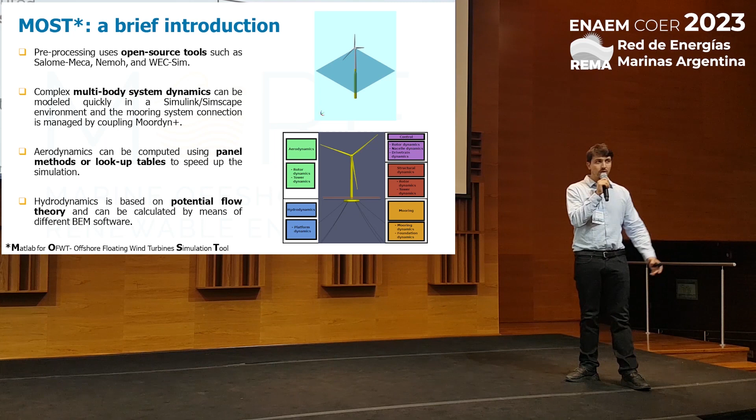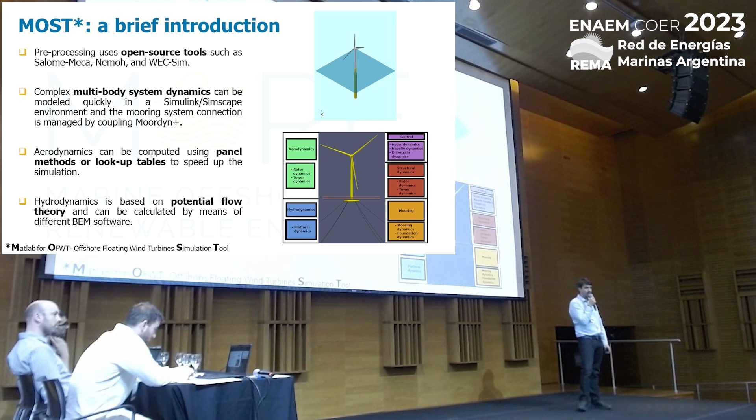MOST, which is an acronym for Matlab for Offshore Floating Wind Turbine Simulation Tool, is a comprehensive platform in which you can model aerodynamic, hydrodynamic, and mooring loads. So you can include in one software all the peculiarities of such systems. The different blocks are solved by different tools. For example, the frequency domain hydrodynamics is solved with open source tools such as NEMOH, coupled with WEC-Sim and Salome-Meca.

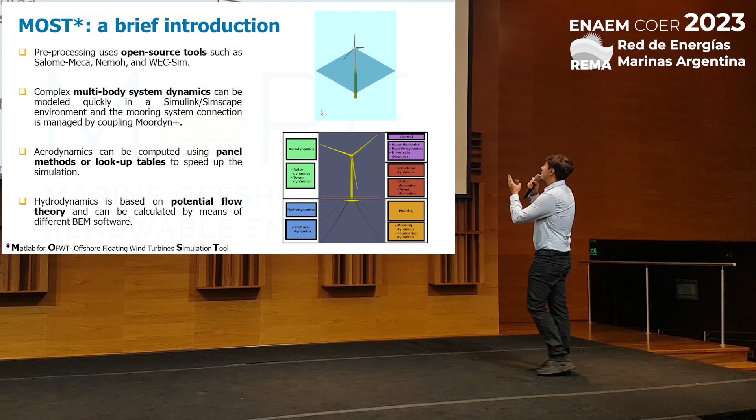And Simulink allows you to solve multi-body system dynamics quicker than other kinds of potential flow numerical models. Aerodynamics can be computed using panel methods or lookup tables to speed up the simulation. And basically this is an overview of all the loads that the software can account for.

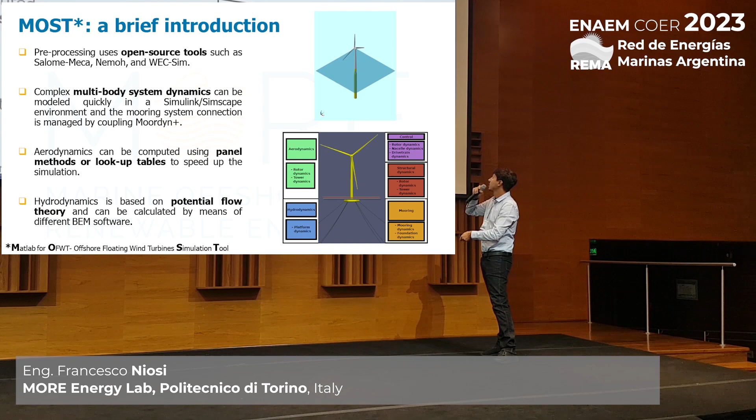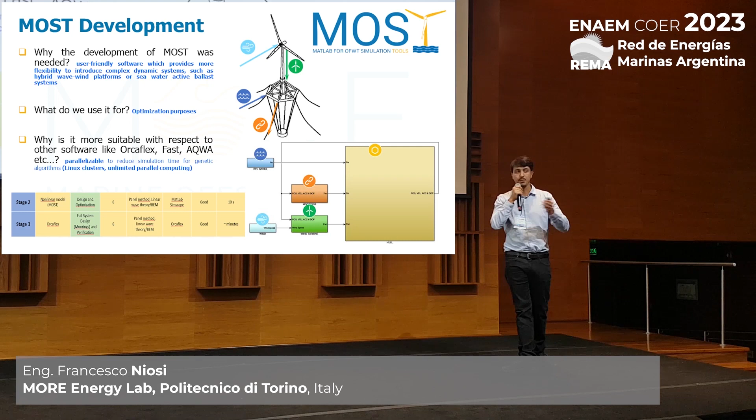The question is why we needed to develop such a model, because there are different commercial software which are actually able to do the same. The answer is we wanted a software that could be inserted inside optimization processes. So basically it needed to be fast in all its components. And it is more suitable than other software because it can be parallelized in clusters on Linux or Windows platforms.

For example, you can see the difference between OrcaFlex, which is a commercial software, and MOST. Basically, you can simulate 1 hour of time domain simulation in 10 seconds with MOST, while you require minutes with OrcaFlex, depending on the time step you choose.

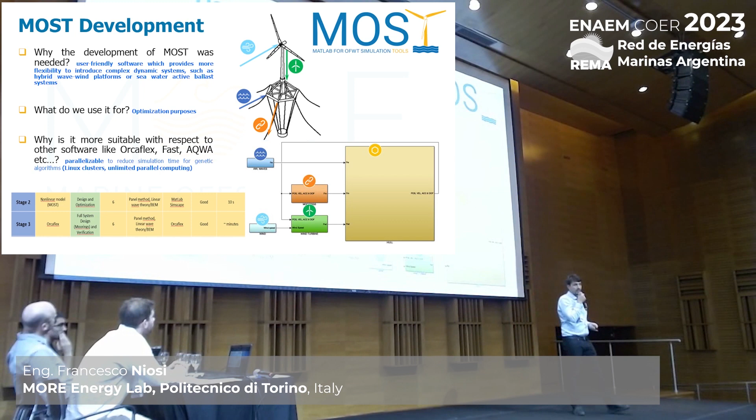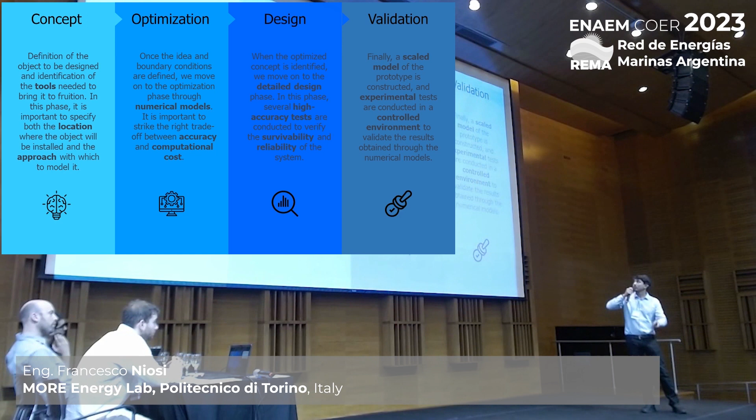We had to use MOST because when we start a project, we start from the concept, the idea, and once we have the solution we want to test, we need to understand how to model and optimize the device. Inside the optimization tools, the numerical model has to have the right trade-off between accuracy and computational cost. So you cannot use very heavy, highly reliable tools.

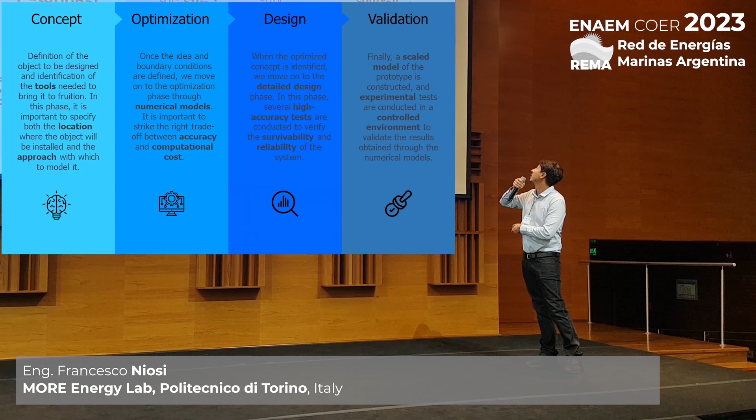Once the optimization phase is finished, we go to the design phase, in which we can improve the reliability and also change the way we do numerical modeling. For example, using CFD codes, which also account for viscous effects, but require high computational cost.

For each project we have in mind, we first need to understand where it can be located, so we know how to run the optimization. For example, if we want to optimize a wave energy converter for a predefined installation site, which can be in the Mediterranean Sea, the ocean, or any other site, we need to understand on which environmental parameters to run the optimizations.

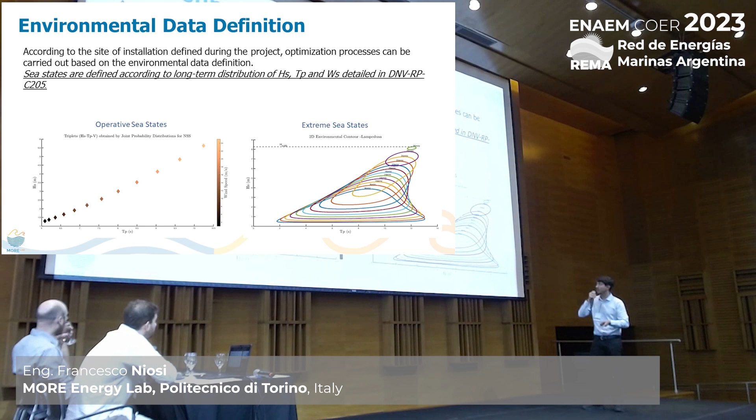So basically, we define the operative states for which we want, for example, to maximize energy productivity, and the extreme states, to understand the extreme events, the highest loads the system will be subject to. That's the pre-processing of the data.

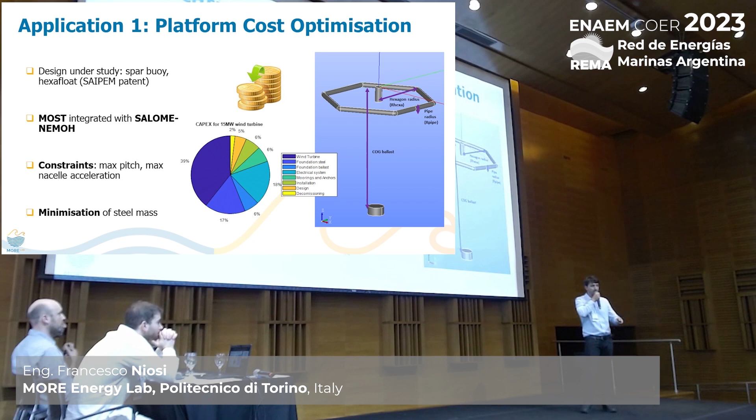Here I will briefly give some examples of optimization paths we made using MOST. In this case, we wanted to optimize the material, so the cost of the substructure for a floating offshore wind turbine. Here you can see the idea behind the optimization. We used MOST for all the dynamic simulations and then got back the results, for example the pitch amplitude of the turbine, which should be minimized to maximize power. In this way, we could try hundreds of thousands of solutions within a couple of days of simulation.

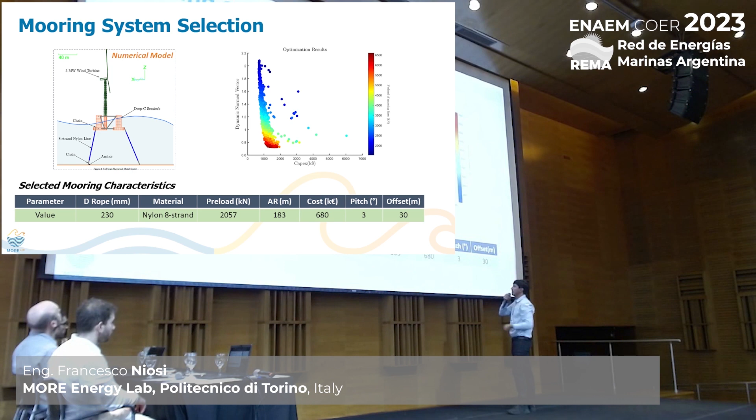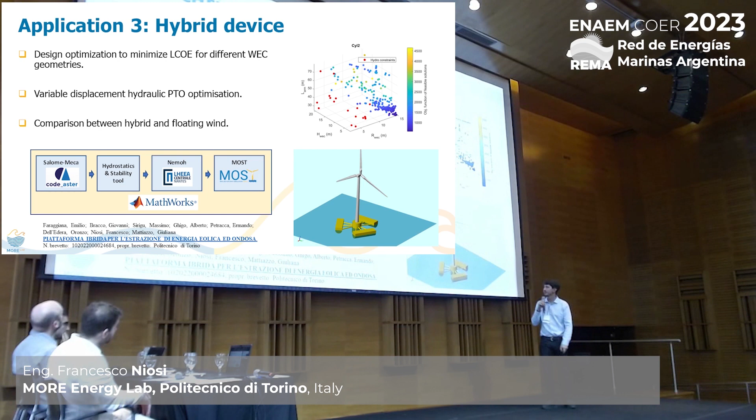This is another kind of application. So basically, it's again a wave energy converter coupled with a floating platform. The good thing about the software is that you can easily shift different wave energy converters and place them in the right position according to your needs. Otherwise, starting from zero to model a new solution of a hybrid platform would be super time consuming for the whole group.

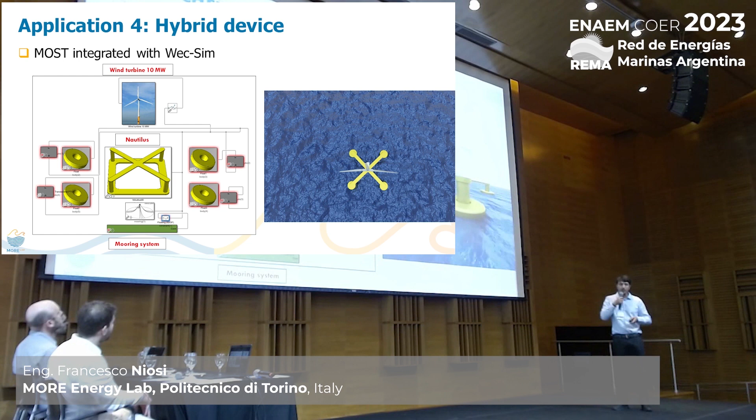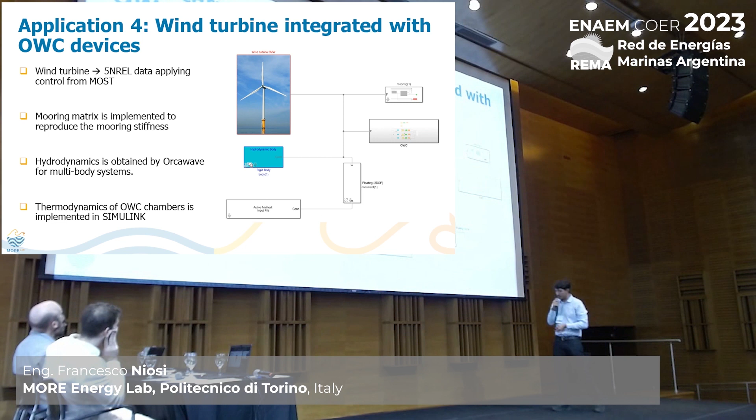This is again another application in which the turbine was integrated with the OWC device. And again, we decoupled the problem. We added the block of the oscillating water column to the main block of the simulation, and we could manage to understand the whole dynamics of each component of the system.

Of course, we did all the optimization and the results were nice and fine, but we needed to be sure that MOST actually works, and that we didn't make any mistake during the code writing or any other mistake that can arise. So we performed some validation processes.

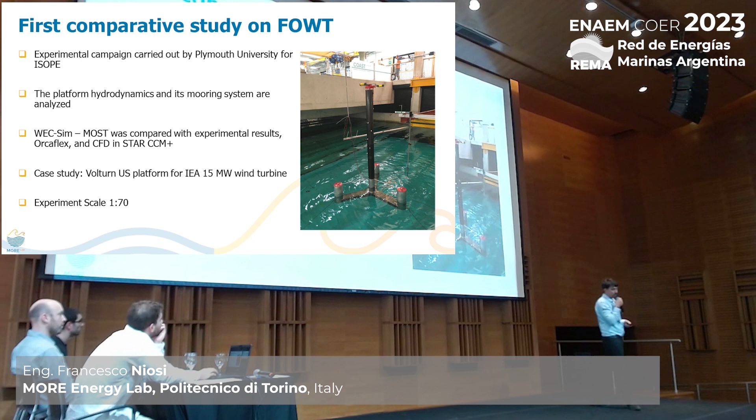This is a validation against a floating offshore wind turbine without any WEC. So it's just simple hydrodynamics with the substructure of the 15 megawatt wind turbine designed by the NREL. And the experiment was carried out at Plymouth University. So basically they released the whole data set and told us, okay, let's run a validation with different universities to see how we can get the results.

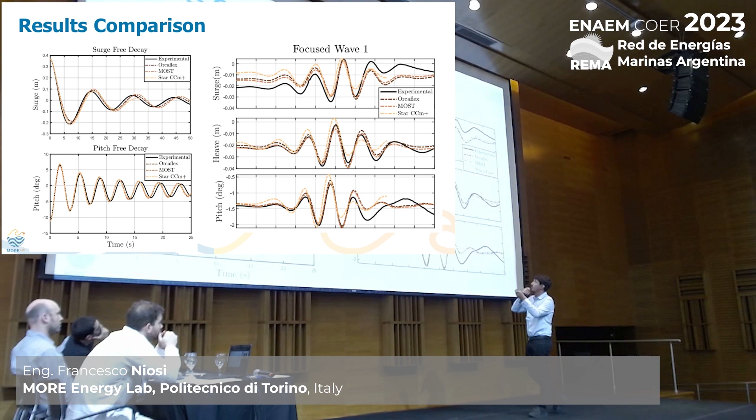So basically in MORELab we used 3 different software. OrcaFlex, I was talking about it before, which is the commercial software, MOST, and StarCCM, which actually is CFD, so it accounts for viscous effects. In MOST and OrcaFlex, we of course introduced the linearized damping coefficients such that the model was well tuned for this substructure. And we managed to obtain good results for all the degrees of freedom, plus also the mooring line tensions.

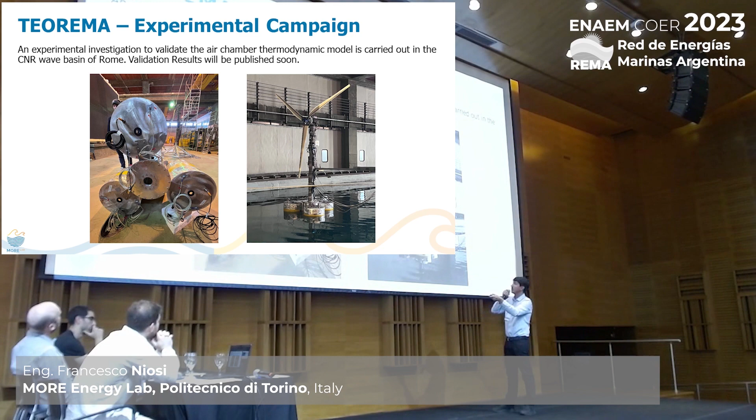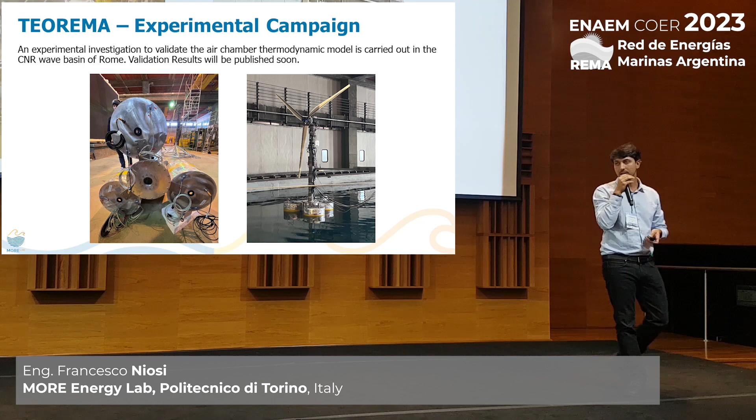Another experimental campaign, which is the corresponding experimental campaign for the OWC device modeling, was carried out in Rome. So basically, in the 3 columns, which are here, here, and here, there are the 3 OWCs, and the main structure is the spar. Validation of this experimental campaign still needs to be done, but we had some previews of the results, which look good.

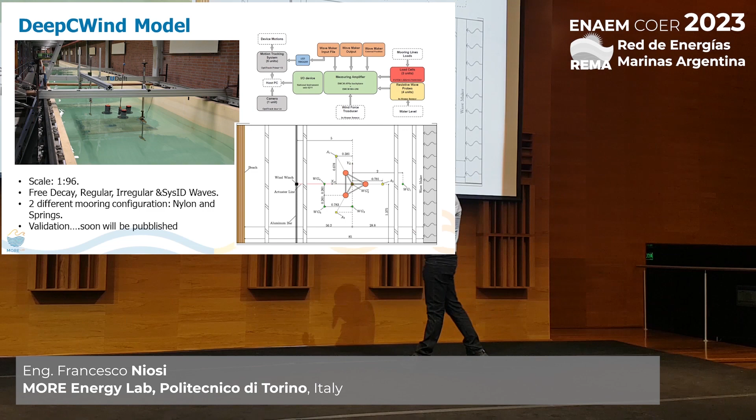The last experiment that we made for validation was carried out in Delft, and accounted for, again, a floating offshore wind turbine, but this time we applied a wind thrust, the wind force, applied with a winch. So basically we were applying constant tension at the nacelle, and the motor torque was controlled in voltage and current. The scale of the experiment was pretty small, so we could understand also the differences between full-scale modeling and small-scale modeling. The validation will be published soon.

So basically these are more details of the experiment, which is actually the same mooring system that I showed in the optimization processes. And finally, we optimized, as I was saying before, the whole system for the Mediterranean Sea. And then I thought, okay, but what happens if, for industrial reasons, the system had to be relocated? I didn't know I would come to Argentina, but I decided, okay, let's get a rough sea. And I decided to make some tests for Tierra del Fuego.

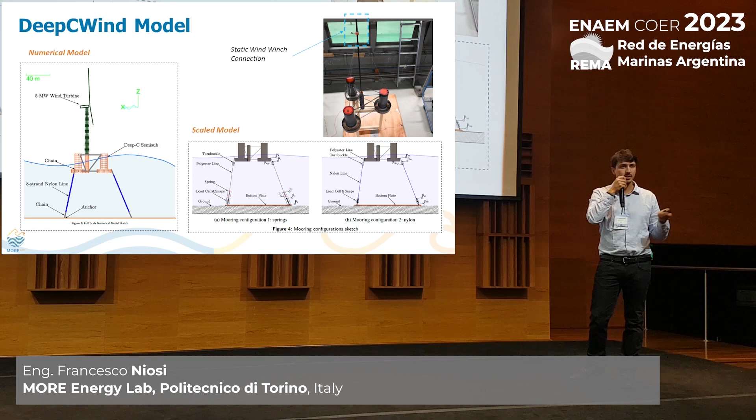So basically, I downloaded all the environmental data of the last 20 years from a grid which is 50 by 50 kilometers of this area here, outside Cape Horn. And I managed to build a wave scatter and environmental contour of this site. By the way, I downloaded all the data from the available website of ERA5.

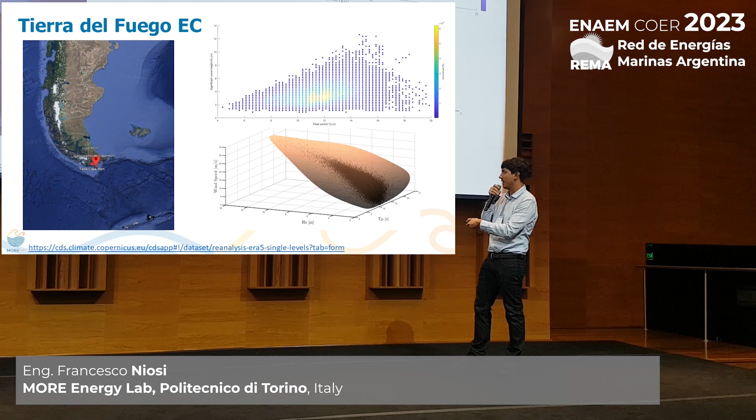And I ran the experimental tests for these waves, which is an HS of 15 and a peak period of 16 seconds. So basically, the system was subjected to higher loads than its design condition. And actually, it managed to resist.

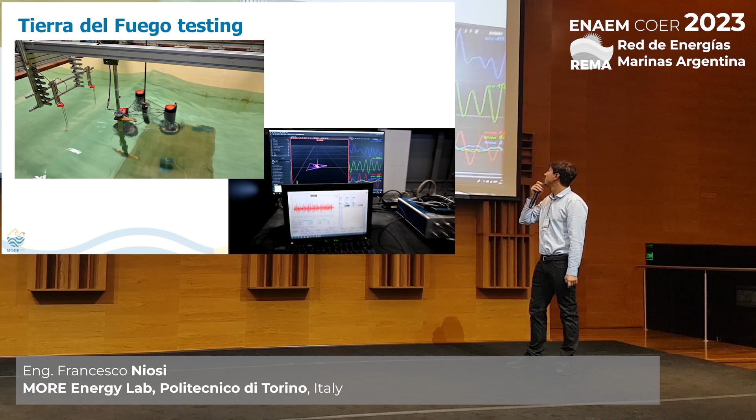And yes, that's a video of the acquisition that we made. So basically, here we were controlling the wave maker, and here we were acquiring the motions and the tensions on the mooring system load cells. And the whole optimization process was done with MOST.

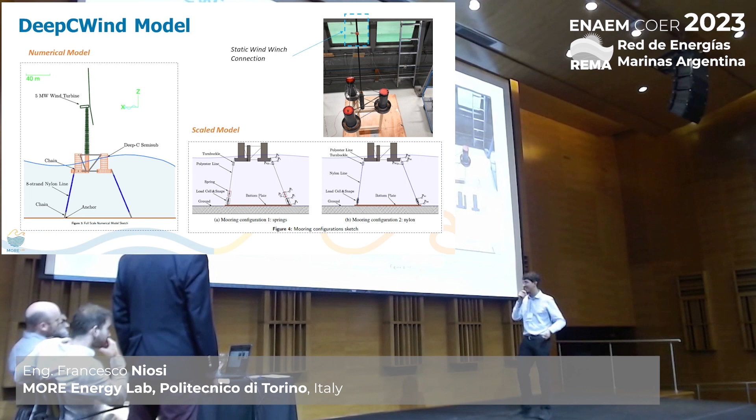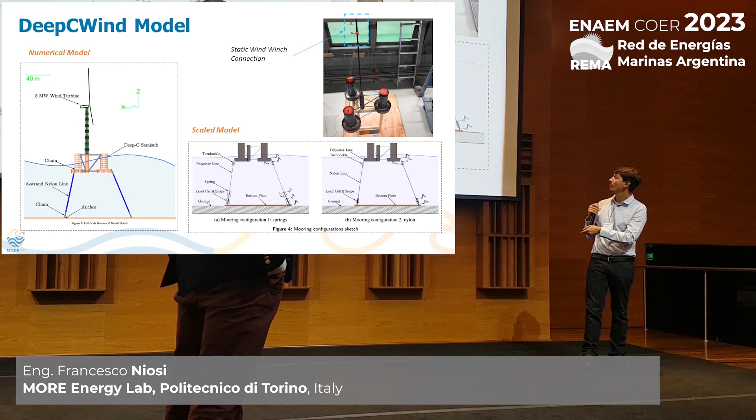Nice presentation, and looks like a great tool. Just in terms of the static wind winch connection, is that force controlled or position controlled? No, actually, when I said controlled, it's not controlled. Basically, we applied at the beginning of each test a constant force, by tuning the voltage and the current going to the motor, which was applying a force that we were reading by the load cell on the motor.

At the beginning of each test, we had a constant force, but then when the structure was moving, it wasn't controlled at all. So basically the force was fluttering, at surge frequencies and wave frequencies. But the fluctuation was very small with respect to the mean value.

For validation purposes, I'm gonna follow two ways. One is to import in the numerical model the wind thrust profile, the input that was acquired, and the other, just the constant thrust, to understand the differences and the error that I could obtain related to this problem. But it mightn't be too difficult just to put force control on the winch, which would then take into account the motion of the platform.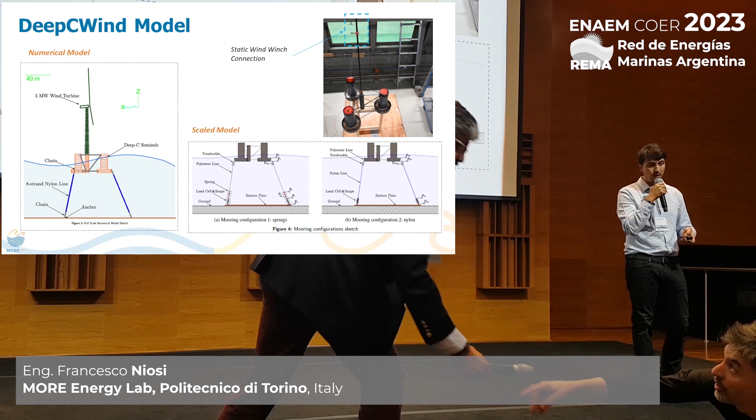Yes, that's the second step that we want to do. I made this experimental campaign in Delft. So basically, they gave us all the equipment and all the facilities to do that, and they had just this wind winch. But for the next experiments, that was actually what we're gonna do.

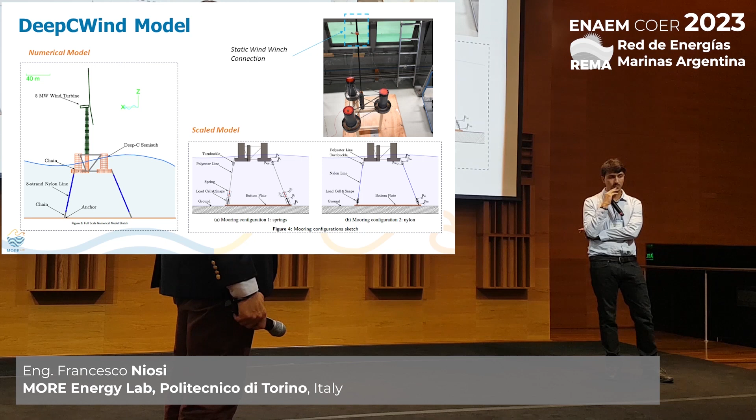I know at a recent visit to Michigan Tech, they have a similar setup with a floating offshore wind platform model in the tank, and they have a robot arm that's moving the top, but it's force controlled. So you put a prescribed additional force onto it. It's actually exactly the same thing as wave makers in a tank, that you're able to just add on what you want rather than be reactive to what's happening outside.

Yes. Looks great. Also, your suggestion is great, and I was thinking about implementing this, but for time reasons and other stuff, we couldn't do it.